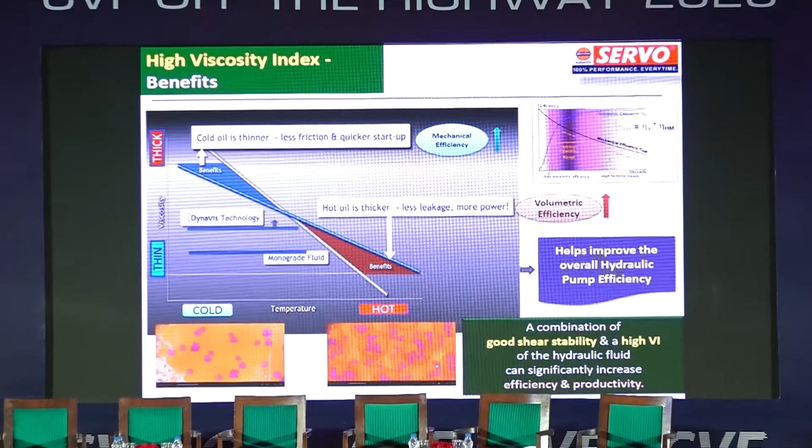As you can see here, the benefits are on both sides. When it is hot, the oil is thicker, but since it is thicker than the other oil, there is less leakage in the pump, and therefore it delivers more power. We call this volumetric efficiency, so your pump volumetric efficiency goes up.

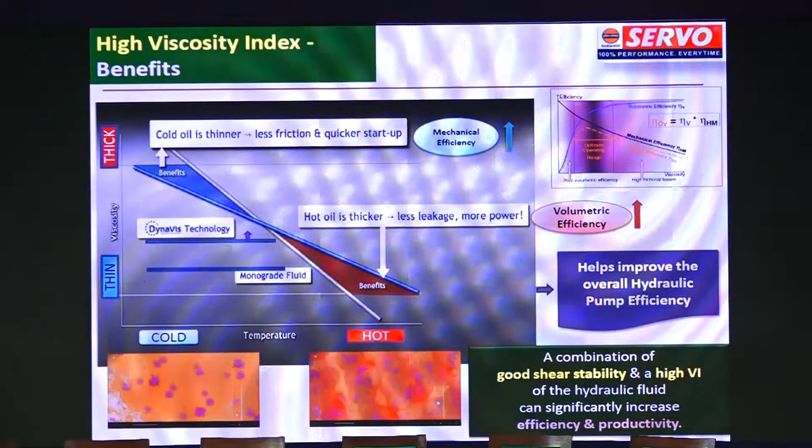But if you see when it is cold, what happens? The oil is quite thin, not thick as the conventional oil would be. So there is less friction and it is a quicker start. Again you gain there, so that would be mechanical efficiency. Both efficiencies together give you the overall hydraulic pump efficiency.

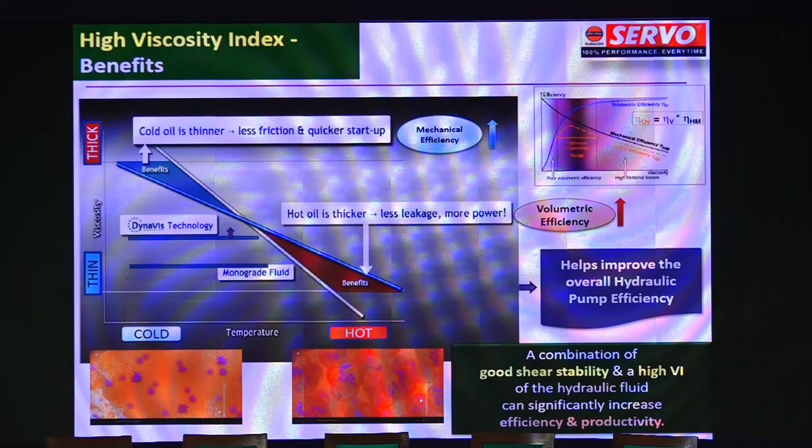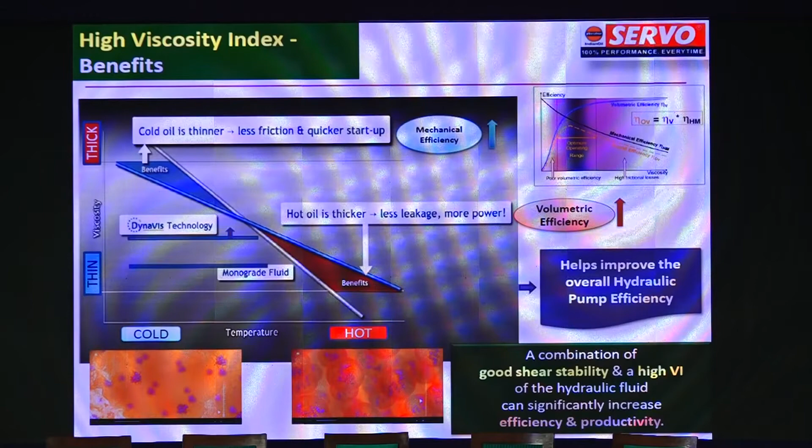So we have done something which has actually helped increase the pump efficiency, and we found that a good shear stable polymer and a high VI hydraulic fluid can significantly increase the efficiency and productivity of your equipment. We don't say it just based on theory. We have done trials in the field, and found that compared to a conventional low viscosity index product, say VI of 95 or 115, using a very high VI fluid like 170 or 180, the differences come out significantly.

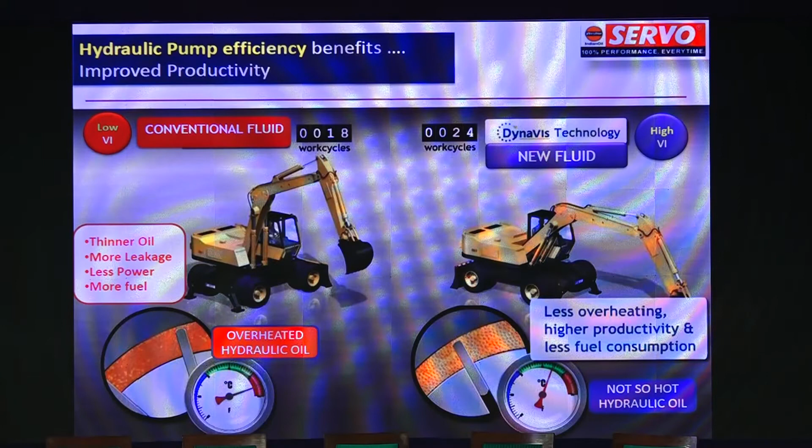We are talking about hardcore data to establish these things, not just theory and inferences based on theory. We have put data loggers on board your equipment. We have measured fuel flow, what is actually burned, and the influx and reflux of the fuel. We have measured the temperatures, and we have measured the pressures.

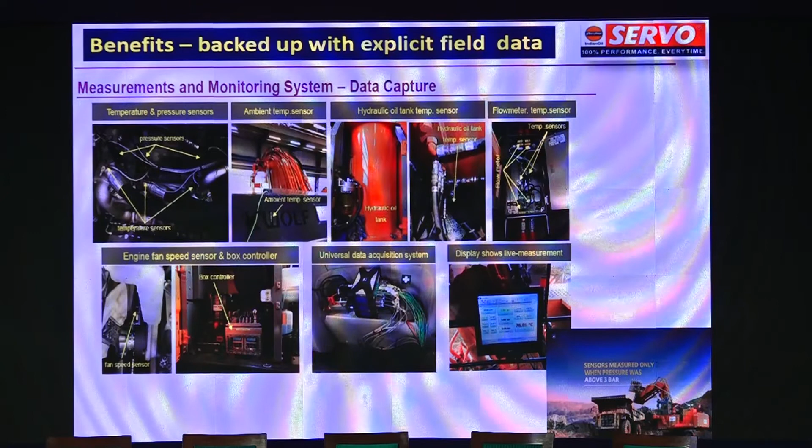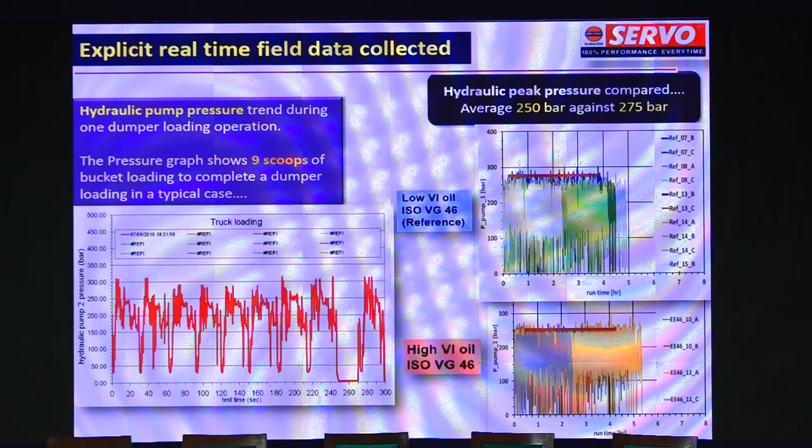On the right-hand side, we are comparing the full day. If you accumulate the whole pressure readings for the whole day, not just one truck loading, you will find that with the new oil, the operator does not always face the problem of higher pressures. When the work is finally being done, there is peak pressure, but not at other times. This also helps improve the durability of the equipment.

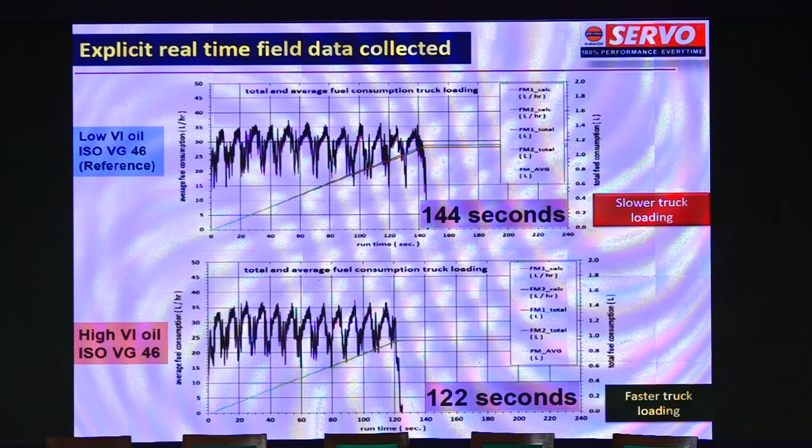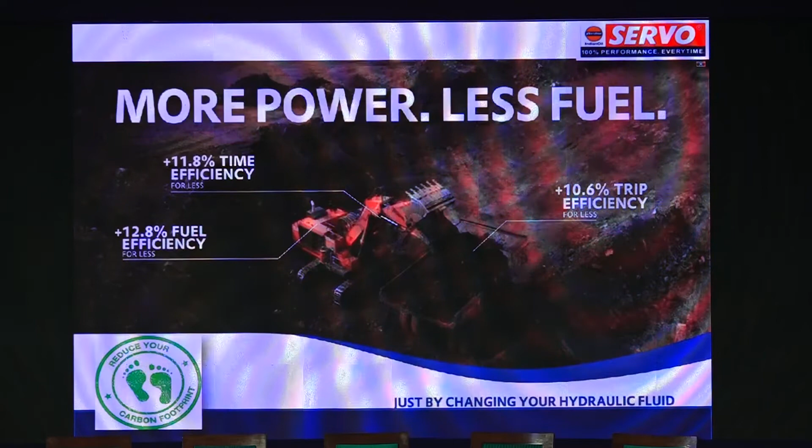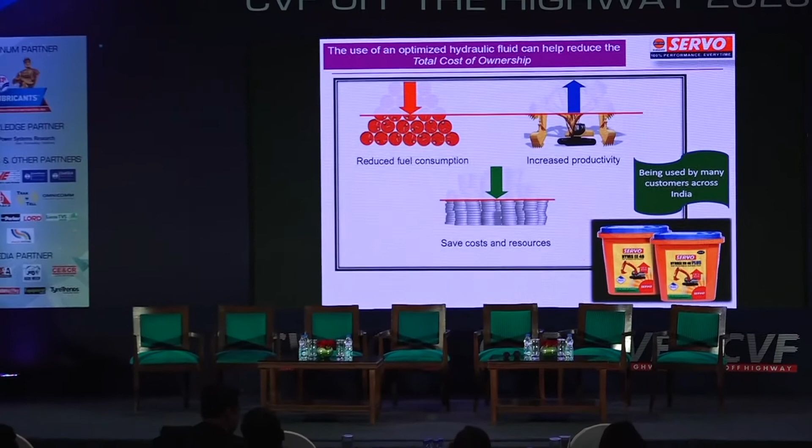Just by changing your hydraulic oils, you can reduce your carbon footprint. We are talking about fuel efficiency here, productivity improvements, and some sort of time efficiency, trip efficiency. This is giving customers a lot of value, and customers are adopting it. I was hearing in the previous session that whatever matters to the customer finally gets bought - this is an exact example of that.

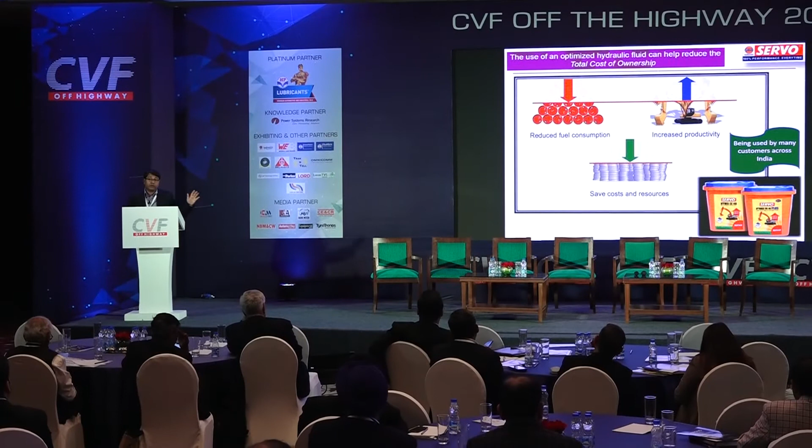It matters to the customer that cost must be lower, and therefore it is being bought with or without OEM credentials. But if you see here - reduced fuel consumption, increased productivity, and saving cost - what is there for the customer not to want? They want all of them.

But I will share with you, it's not limited only to customers. We have approached OEMs also, different OEMs. These are a few certificates which we have generated. Customers across India are using it. Tata gave us an Innovation Award - it's recognized as an innovative product for them.

They have this annual summit for all Tata Group of companies, and for that they gave Indian Oil this award and recognition for this fuel-efficient hydraulic oil. We have done trials in Coal India mines also, so we are talking about real field trials, not in any very controlled environment - and other customers too.

I talked about two products, so I discussed one, and the second one is related to reducing your NOx and helping you reduce NOx. I know it's the engine technology people who are doing it with SCR coming in, but you need something - diesel exhaust fluid - which is the product needed to help reduce the NOx.

So just a few slides on where we are today, how we are placed. India is very well placed globally when we talk about the adoption of the latest emission norms.

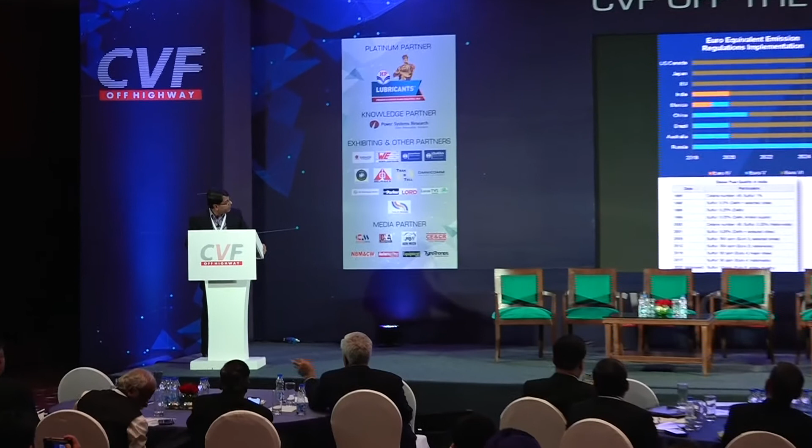On the left-hand side top, you can see US, Canada, Japan, European Union, and India, they are all from 2020 moving into BS6. So we are really jumping into that league here.

On the left-hand side, the chart talks about sulfur content in the fuel. We were talking about 10,000 ppm in 1995. From 10,000 ppm it came down to 5,000 ppm, then 2,500 ppm, 500 ppm, 350 ppm, 50 ppm, and 10 ppm now. So you see the improvement that has really happened in sulfur and the quality of fuel.

Now when it comes to construction equipment vehicles, or the non-road Bharat stage, also called TREM - TREM 3A is in force now, but TREM 4 and 5 is the scenario you are staring at. With these emission norms, the whole focus is on reducing particulate matter. The main changes are: first, emission norms now cover even smaller engines, and second, it talks about reducing particulate matter substantially.

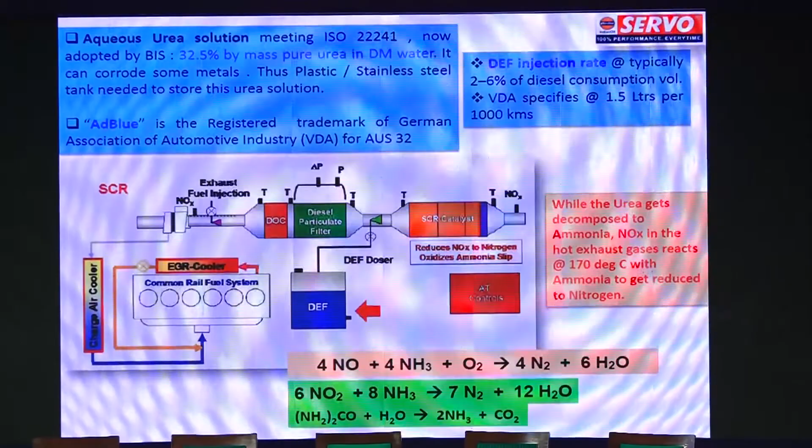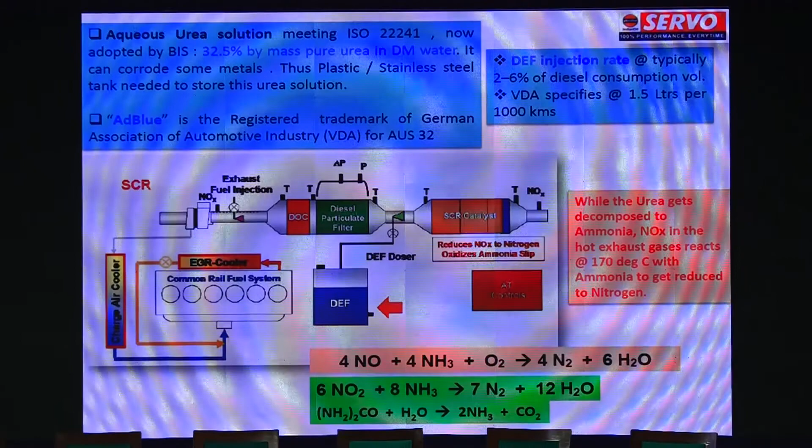So what is this exactly? This is basically an aqueous urea solution - people call it by different names, but it's actually aqueous urea solution. We sell fuels which are mineral oils generated from natural sources, but here we are talking about urea, which we have to handle at 32.5% weight put in DM water, and as a solution this is supplied to the points where it will be used in different containers. But since it can corrode, the idea is to have plastic or stainless steel tanks wherever possible.

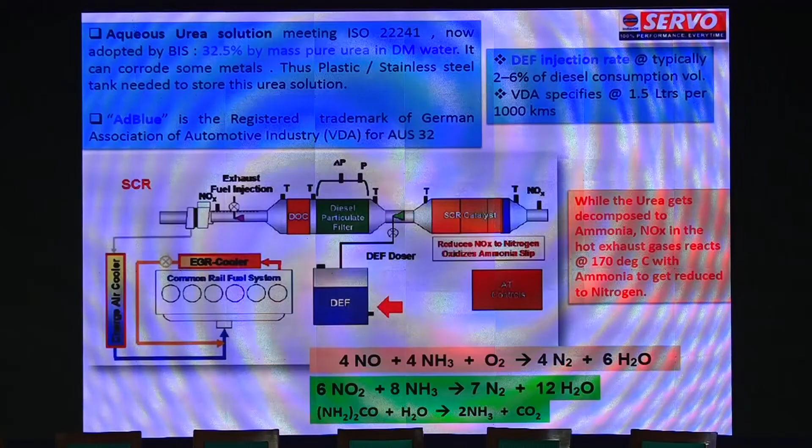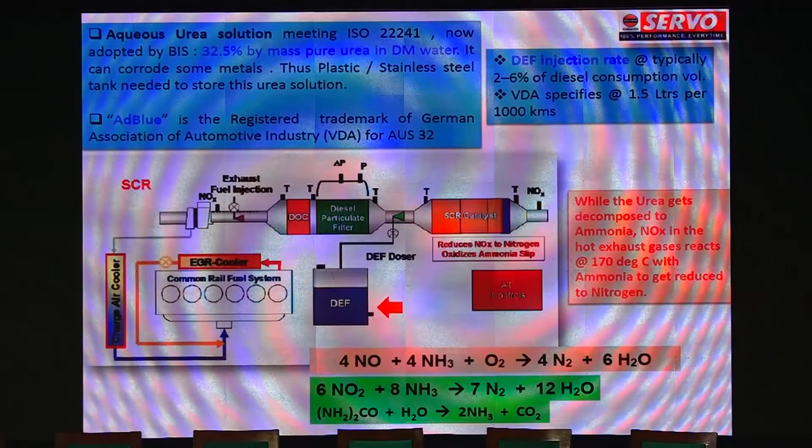And the injection rates are such that we see a huge volume or requirement coming forward from April 2020 onwards. So to understand the basic theory behind it, urea gets decomposed into ammonia, and this ammonia reacts with the different NOx, NO2 or NO, and this gets converted into nitrogen.

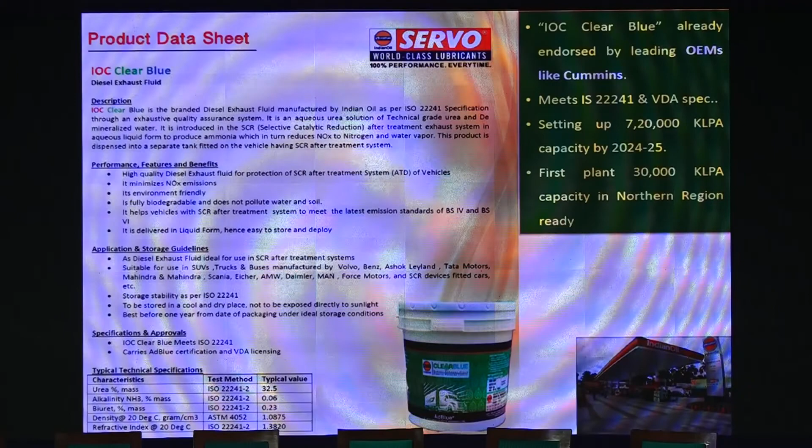So the product that will help you do this is IOC Clear Blue. It's going to be made available to large institutional customers at their point of operation, like mines and others. It will also be available at our retail outlets, petrol pumps, spread across the country, which you are well aware of, and it will be available in containers like demonstrated here.

So we are also working to get approvals from different OEMs. We have already signed with Cummins engine - so Cummins as an OEM has already tied up with us. Very shortly, as things roll out, we are all prepared for it. Thank you.